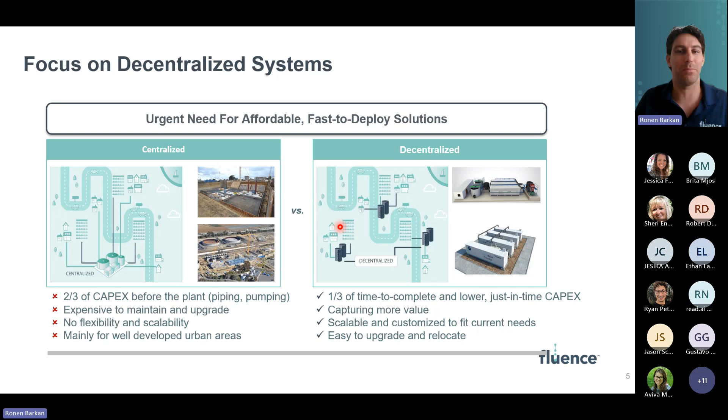As I mentioned, Fluence, we both are offering water treatment as well as wastewater treatment. So by water treatment, that means that you would need to provide potable water to that development. So you would either utilize a local source of water, may that be the ocean, so you would need a small desalination plant, or may it be a local well, so you'll need some sort of a brackish water treatment facility or something along those lines. That's what we call our NIROBOX product line, which is shown right here.

And then obviously after that water has been used by the residents of the new development, it turns into wastewater, which is when you would need to have some sort of a wastewater treatment system. For this purpose, we're utilizing our Aspiral product line, which I will take you through in more detail today.

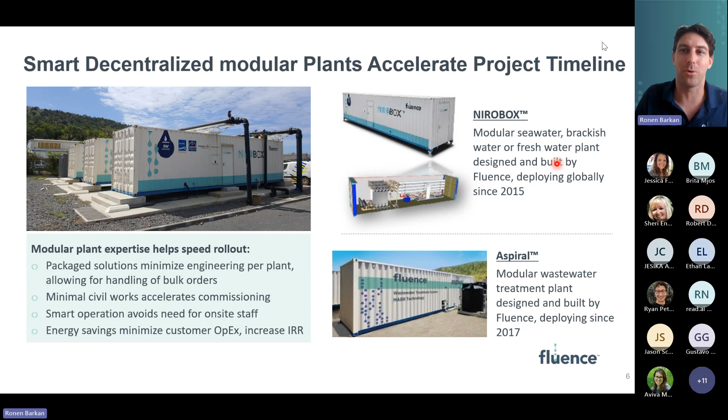So unlike many other companies in our industry who are mainly focused on municipal applications, and when I say municipal application, what I mean by it is that these are applications that are being initiated by a city or by a county or any municipality that essentially fund these projects with public money. And that has a completely different route on how things get done. It's typically a much slower process that can take anywhere between, I would say, as little as 2 and as high as 10 years to just take through the entire project. And it's an extremely expensive process because it needs to go through a bunch of checks and balances along the way that make the whole process more expensive.

What we've done at Fluence, while municipal applications are definitely something that we look at, we look at, call it the real estate development market with great focus. And this is one of our target markets in North America, the Caribbean, and other places around the world. And the reason I bring this up is because what Fluence had done was to really try and put ourselves in a real estate developer's shoes and really understand their needs and come up with solutions, not only product, but solutions that would cater to those needs. So to try to identify some of those needs, that's how we look at it.

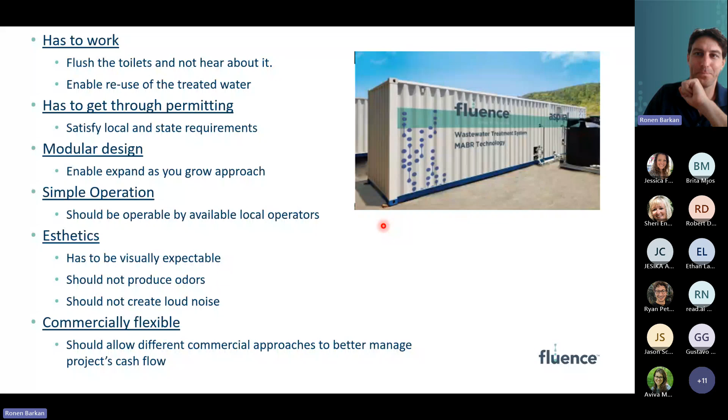That is how we look at the need from a real estate developer's shoes. So at Fluence, as you can all understand, we have multiple types of solutions and product lines. The product line that we're going to focus on for the rest of the presentation is what we call our Aspiral Flex system. I'm going to focus today on the wastewater treatment part of it. As I mentioned before, we also provide water solutions, but I wanted to focus on one because it's pretty much similar to the water side of things. That's why I decided to just go with our package wastewater treatment solution, which is called Aspiral.

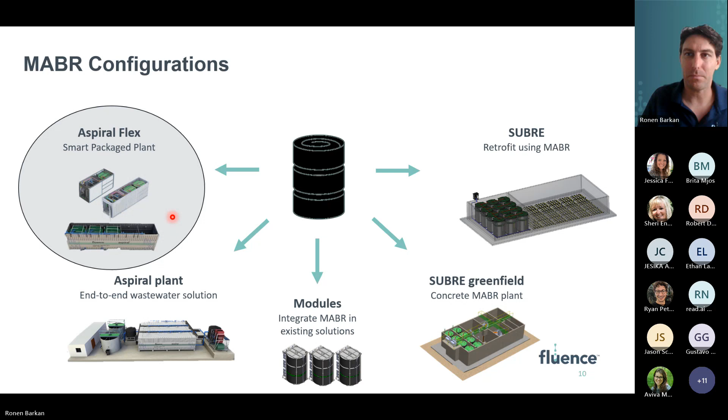So we've developed this product line that is built out of building blocks, and basically we call it the building block approach. I'm a big Lego fan. I always played Lego as a kid, and just like many other kids, I really enjoyed the flexibility Lego blocks would have, right? You could build different blocks with Legos that would have different functions. We basically try to do the same thing with the wastewater treatment plant. Instead of your conventional Lego brick, we used a marine shipping container as the standard Lego brick, if you would.

When I say marine shipping containers, it's not like we're taking used shipping containers and refurbishing them and then modifying them to what you're seeing on the screen. We build tanks from scratch, but we design them in the same size and dimensions as marine shipping containers, and we actually certify them as such. What that does is help us standardize all of our solutions. That means that from our standpoint, engineering and assembly efforts get reduced quite significantly, because you're always operating within the same volume, that same 40 by 8 building block.

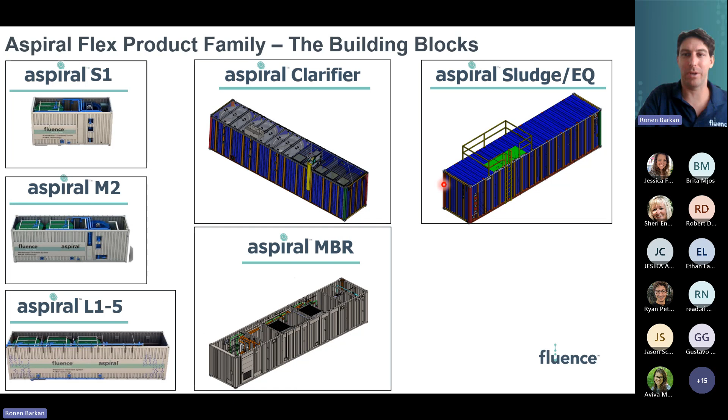So having these different building blocks as our tools at Fluence, we are able to put them together and customize a solution for different applications, but without going through the whole effort of designing everything from scratch. We have those existing building blocks. It's all a matter of just putting them together. And I'll try to give a couple of examples along my presentation.

So let's use one example for a residential development. Okay, let's say that there is a new development which is going to be phased into two phases. The first phase, we're going to look at building 335 lots, which are going to have a couple of residential units on them. And let's assume that every residential unit would produce approximately 150 gallons per unit per day. And so when I multiply 335 by 150 gallons, I get to approximately 50,000 gallons per day worth of wastewater that needs to get treated. That's how we would look at it.

So we would talk to the developer. We'll try to understand how many lots they would like to start with, convert that to how much wastewater we need to treat. We can assume what comes in. Whoever is not very technical, you don't need to really understand what BOD means, what TSS means, or what TKN means. These are elements that help us to understand how much pollutants exist in the wastewater and how much of it needs to get removed. Okay. And so that's what's going to come in, influent, and what's going to come out.

These are assumed. These are going to be dictated by the local regulator, and also by what you want to do with the treated water, right? So some developers would like to reuse it for irrigation of the plants around the development. Others would like to just discharge it to the environment. Whatever you decide to do with the treated effluent is going to change the type of effluent you'll need to get to. Okay, so here we're assuming these numbers right here. Again, I don't want to get into what each one means.

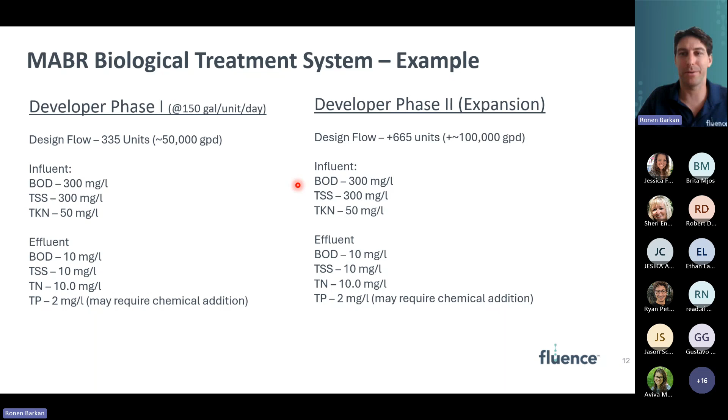Okay, and so for the first phase, we would say, okay, for the initial 50,000 gallons or 335 units, we would need what they call one equalization tank, one of our Aspiral L3 biological reactors, one of our ultrafiltration containers, and one sludge holding tank.

Just very briefly on each one of these building blocks. Each one of these building blocks is its own treatment unit, but treats a different contaminant in the wastewater, if you would. So for example, the equalization tank,

Excuse me, I'm a little under the weather. That's why my voice is a little deeper than usual, so I apologize.

The equalization tank is a component that is meant to buffer the peak flows that development gets, right? So when you build residential housing, most people take showers in the morning and in the evening. So that means that a lot of water is going to come into the wastewater treatment plant during the morning and during the evening. But it does not make sense to design a full-blown treatment facility for those peak flows.

So what we do, we put what we call a dump tank or a buffer tank that would know how to take those peak flows in the morning and in the evening, just accumulate the water, but then make sure that an even flow goes to the actual treatment facility 24 hours a day, 7 days a week, right? So instead of designing for a big, large treatment facility that knows how to accept those peak flows, we put a buffer tank in order to mitigate those flows and just treat the wastewater evenly 24 hours a day, 7 days a week.

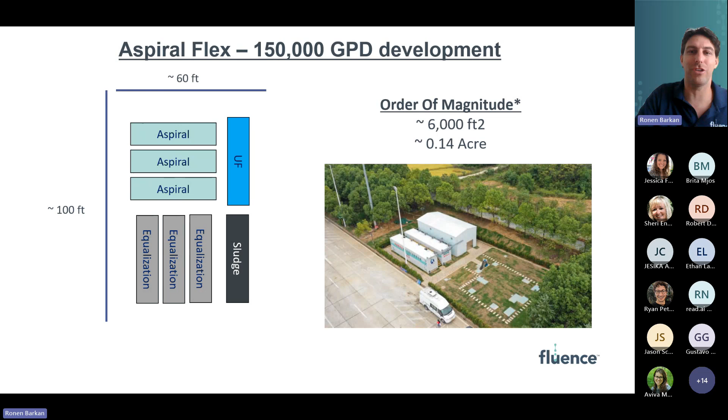Okay. In reality, the engineer that we work with will receive these types of documents, which really lay everything out, show how the piping goes, show the type of piping that comes with it. I bring this slide in order to show that once we basically developed all of this product line around these building blocks, this enabled us to produce documents extremely fast that basically say, okay, dear developer, you want to treat only 335 houses now. This is how many units you would need. One, 2, 3, and then the sludge holding tank, 4 of those units.

We generate this drawing that you see in front of you in a matter of, if you would, minutes. We generate the bill of materials that is associated with the installation of these units, and that type of document can be sent to a local general contractor, and they read these types of documents all day long. So for them to understand this shopping list right here, they can give you a price estimate of what it would cost to deploy these units, also in a matter of a couple of hours. Okay, so everything gets streamlined, right?

Because again, all the product line is centralized around these building blocks. It's very easy for us to generate these automatic documents or tools that produce these documents very quickly to pass on to a local general contractor or an engineer to review and get back to you with some good numbers or budgetary numbers to go with. Okay, that's why the title of this presentation is Streamlining these utilities geared towards real estate developers.

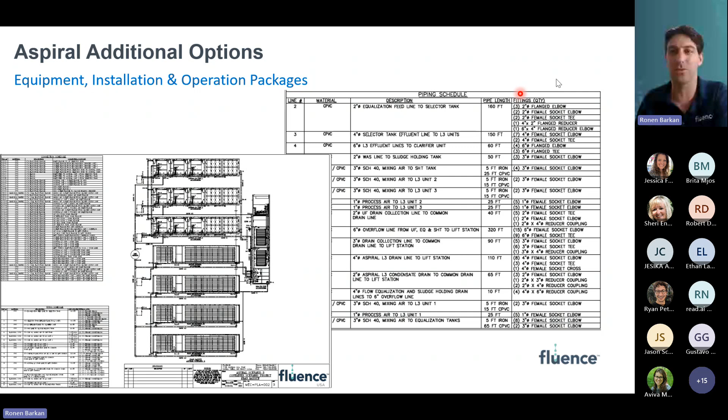Okay, another type of document that we would produce would be what we call a 20-year life cycle cost analysis. So any solution that we come up with, we can then follow up with what we call a 20-year life cycle cost analysis, which basically says, okay, for the next 20 years, operating this facility will cost you this much.

So you can also understand how much you're going to be spending annually, because we understand that many developers are not planning to invest and develop a property and then operate it for the next 20 years. Many of them will just stick around for the first, call it 2, 3, or 5 years and then flip it, right? So this gives you the estimated cost associated with operating these facilities on an annual basis, but then on a 20-year life cycle cost, which you can then pass on to whoever is going to be buying this development.

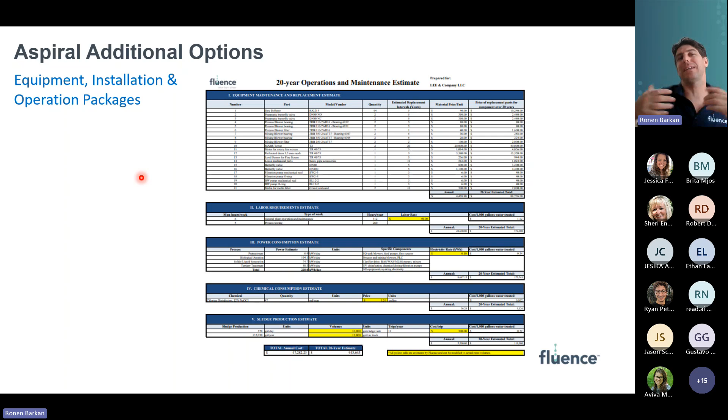We at Fluence produce these documents extremely quickly, again, because of the nature of this product line, that it's all pre-designed, pre-engineered, and ready to go. So we know exactly what each element that we add to it means. And because of that, this enabled Fluence to come in and say, you know what, here we can offer the equipment, we can support you with the installation, we can support you with the operation of the system, and basically take all this burden away from you, and we'll come in and take over.

And that kind of leads me to the last point, which is what I showed in the slide, where we said that we felt that developers need someone that will be commercially flexible, as I mentioned. And that's why we not only developed the product that I just showed you, but we've developed a whole scheme of commercial approaches that we can work with the developers. So anywhere from a lease to own, if you would, for short terms, as little as 2, 3, 5 years, I would say.

You can see these are just some examples where we would work with the local developer. We would lease them the equipment and basically help them own it during the time frame. We can also do just a straight lease, right? Obviously, these things will impact the monthly fee and whatnot, but the bottom line is that we are geared up to provide, as I said, a lease to own, like you would have in other lease to own instances on

cars, for example, a straight lease, or basically a complete turnkey sell, which we would say, okay, here is the equipment, here is the installation associated with it, here is the engineering piece of it. So we would work with local engineers and permitting agencies to make sure everything gets permitted and try to develop this package that would hopefully take a lot of the heavy lifting away from you, the developer, which will enable you to focus on other very important things that are associated with this development, while you can rest assured that you're being taken care of from the wastewater treatment side or the water treatment side.

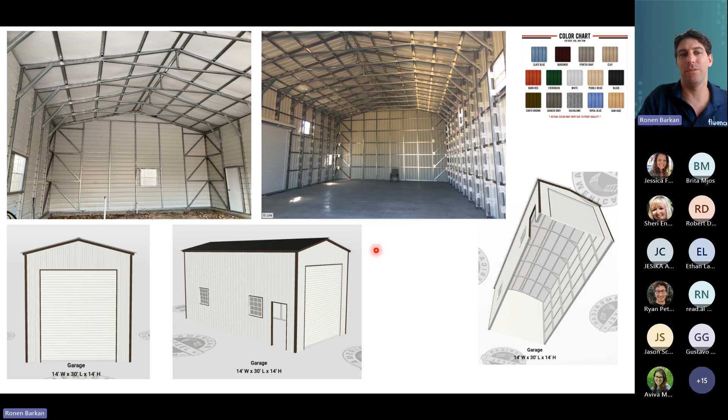I did talk briefly about how it's important for the solution not to be an eyesore, how it's important for the solution not to generate odors, not to generate noise. These are just examples of different solutions that we work. They're not necessarily what we do. In other words, Fluence does not provide shelters for wastewater treatment plants, right? Or we don't necessarily provide the painting on the wastewater treatment plant, but we are familiar with it. We have worked with different vendors to try and satisfy the client needs.

And my point is, we're not this type of company that tells you, okay, here's our product. Now you want to make it look nicer. Okay, good luck with that. No, we will work with you. We will try to offer some ideas that can work or that we've done before. That's why I'm showing some examples. You may like this one more, you may like this one less, but the bottom line is that we are familiar with it and we can accommodate different needs based on your drivers or your community and so on.

So I think this is a good summary slide for the value proposition that the Aspiral Flex or the Aspiral product line brings with it. Okay, so this is kind of a quick summary to what I've talked so far. Basically, we feel the modular approach, which enables you to build as you grow. So you only install the treatment capacity that you need right now, and then as you expand, you buy more equipment and you treat it there. That helps you to basically control your cash better.

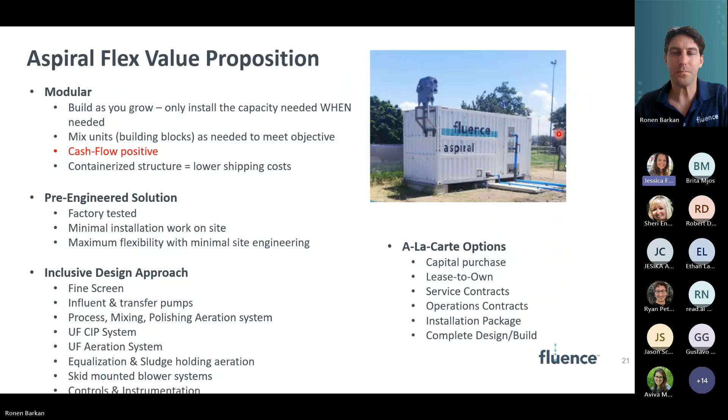The first question we have, Ronen, is what percent solids out of the sludge tank digester, and does it meet any volatile solids reduction and vector reduction? I'm sorry. Can you repeat that one? I lost you somewhere. Can you see my screen? I'm reading the question as well. What percent solids out of the sludge tank digester, and does it meet any volatile solids reduction and vector reduction?

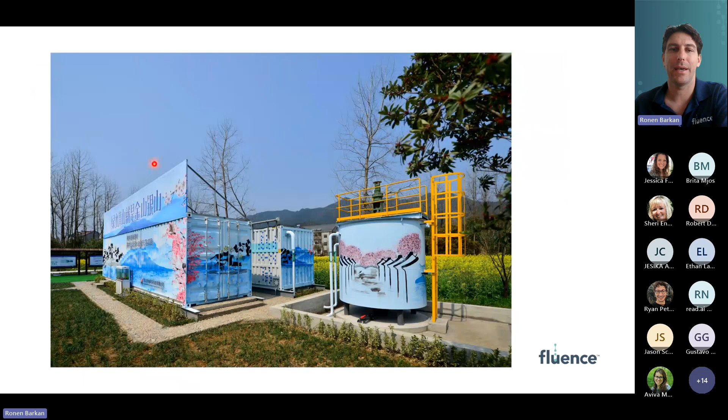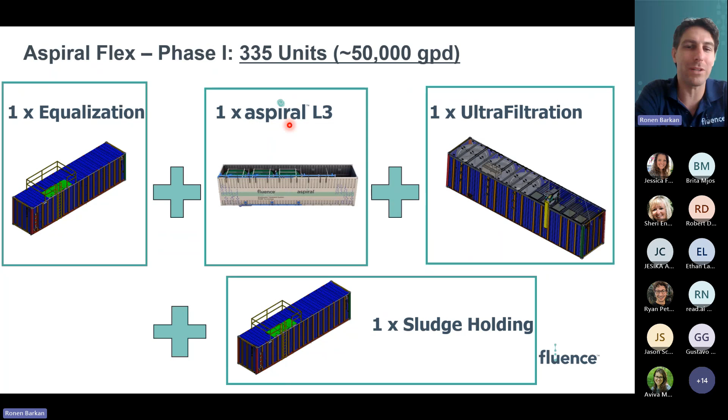Okay, so what we provide is what you call a sludge holding tank, okay, with a decanting option. What that means is that the WAS, this is a technical question, so I apologize if I'm saying some words which may sound like cuss words to you all. But basically, what we're providing is this sludge holding tank right here, and I have a data sheet that shows it. Perhaps I can pull it up on the screen real quick.

But long story short, what we're doing, it's a sludge holding tank that has a capacity of anywhere between 7,500 gallons to 17,000 gallons. The WAS, waste activated sludge, coming out of our process is approximately 2% of the daily average flow. I think I'm going to pull up the data sheet for the sludge holding tank right here.

Can you guys still see my screen? Jessica, I'm deferring this question to you. Yep. Okay.

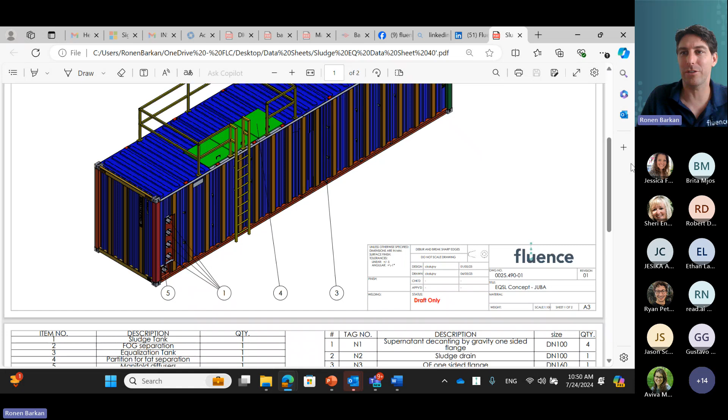It looks great. So basically what that means is coming out of our process, as I mentioned, you're going to have some waste, what we refer to as waste activated sludge, or in short, WAS. That WAS comes out at approximately 2% of the daily average flow. So if you had about 100,000 gallons per day worth of wastewater to be treated, about 2% of that translates to 2,000 gallons a day that will need to be accumulated in this sludge holding tank.

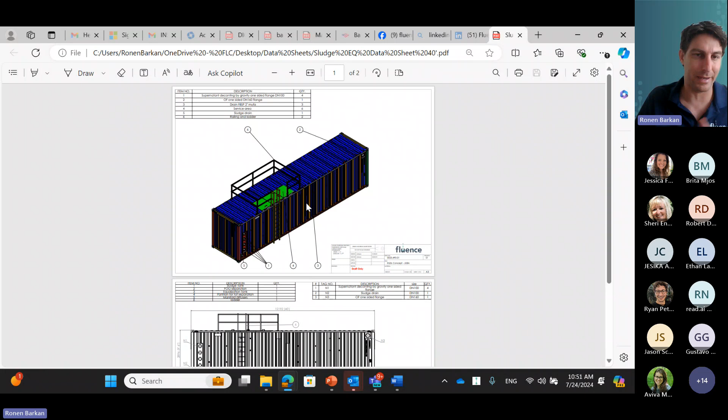But as you can see right here, can you see my cursor on the bottom side that I'm circling? Yep. These flanges get connected back into the equalization tank, because the sludge out of our process has very good settling properties. After about 40 minutes, most of the heavy solids settle down, and then you'll have an upper phase of water, or supernatant, which gets pumped or gravity flows back into the EQ tank, reducing your sludge content for evacuation to about 1%.

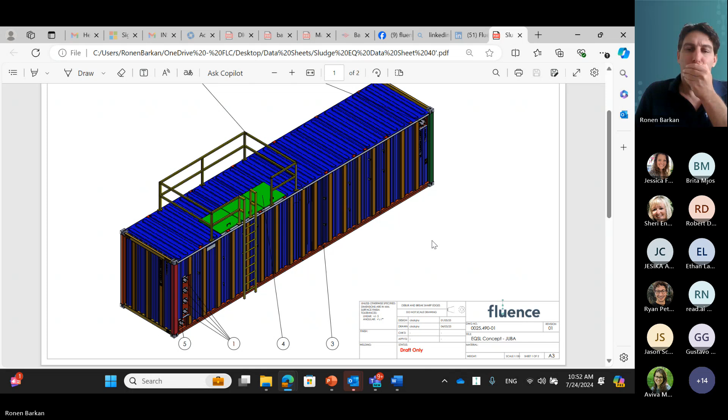So realistically speaking, if you had a 100,000 gallons per day treatment application, you'd be left with about 1% of that as sludge that you'll need to evacuate off site. So that would be about 1,000 gallons a day with a solid concentration of about 2%. I hope that answers the question.

Great. Thanks, Ronen. Should I go? Yeah, we have quite a few over on the side. Okay, so I'm just going to read that out loud.

Can you speak to typical lead times for a system to be delivered in the Southeast USA as presented? So our typical lead times, we're talking approximately 6 months. Sometimes it can go a little quicker, sometimes a little slower because we are still bound to the shipping world. Sometimes there are no issues, sometimes we do see some delays. 6 months is a good estimate to take into consideration.

I will say that sometimes we do have some available units, so that can be even quicker. I don't want to say immediate, but definitely quicker. But to give a simple answer to a simple question, I would answer 6 months as a lead time for the units to be delivered to the job site.

The next question is, do you have any installations in the Arctic or subarctic? So Fluence has multiple product lines. The simple answer is yes, but for the Aspiral product line, we have approximately 400 installations globally. Many of them are in cold environments, such as the northern part of Asia, which gets extremely cold. Here in the US, we have installations in Oregon, Iowa, Indiana, places that do get cold. Subarctic, like Alaska, we don't have those installations quite yet.

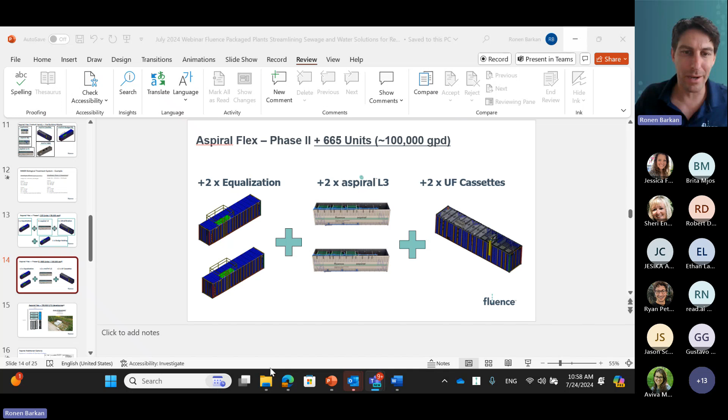Okay. I will skip to the next question that you had asked. That's about the installation in colder climates, if we insulate the containers. So we do, but insulation, excuse me, and I will bring that up. What we prefer to do is basically either trace heat the pipes, the external pipes that are associated with the solution, because as you saw, there is some external piping that takes place. So we would trace heat the external pipes, but then we will either put a structure around it.

We do have applications such as in Albuquerque, New Mexico, which is considered a high desert, and it can get pretty cold over there, where we have insulated the container itself. In other words, we put, I believe, 2-inch fiberglass plates around the unit and then skinned it with a wooden frame. So yes, the answer is yes. There are multiple ways to go about it. We really work with you to explain what is best under your circumstances. So for example, in Iowa, which also gets very cold, we just put a shed around the whole unit, right? So it really depends on the specific application.

Trying to go back to, here we go. Oops, sorry. Okay, next question. Excuse me. The last question is, for countries with power access issues, what are some options for power?